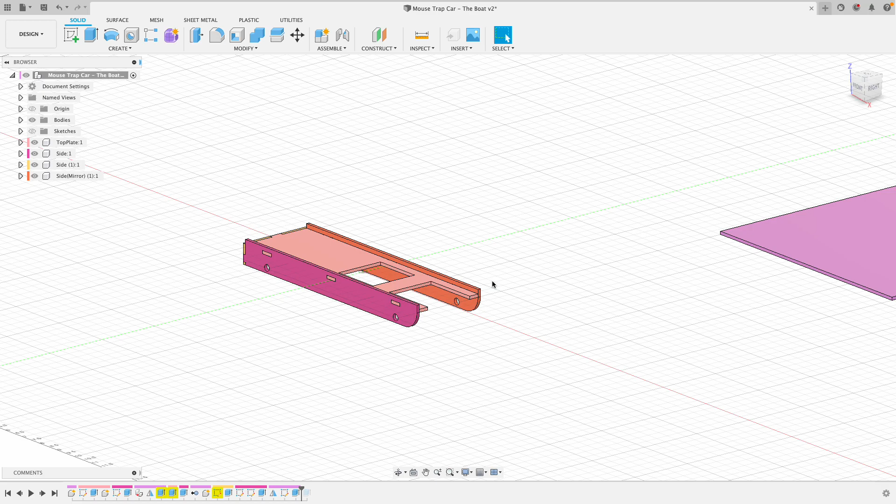We want to make sure we don't delete this, but hide it. So I'm going to go over here to bodies, and you want to find where your sketch palette is for that platform we built to manufacture it. I'm just going to hide that body. Simple as that, you can see it there. Mine's right there, yours might be under a component somewhere.

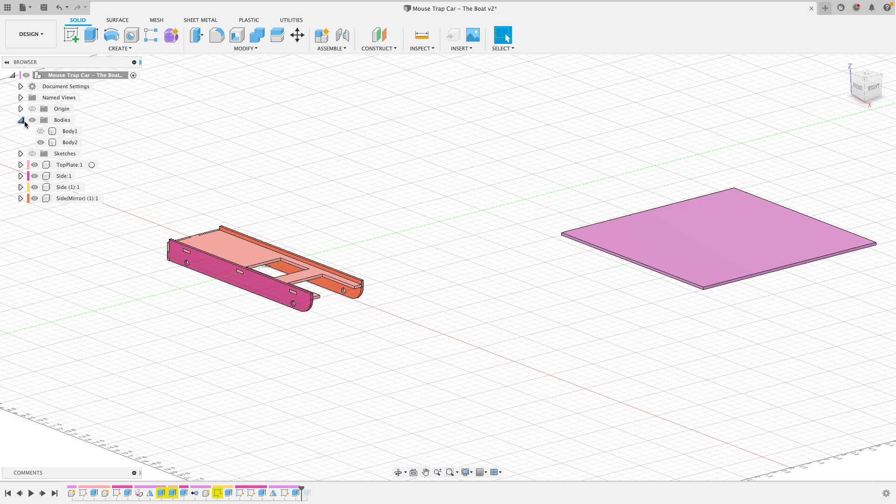You can see there's a couple different things. I have a body 1 and a body 2. I'm actually going to delete both of those right now, so I just have this here. Okay, so I have all my components: my top plate, my sides, and then I have a back side too.

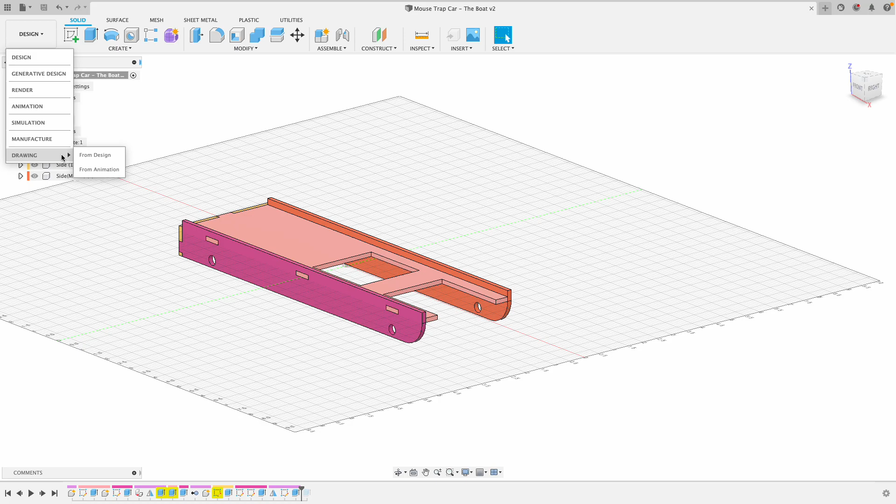I'm going to save it right now, and then go up to my design tab up here, and go down to drawing. We're going to do 'from design.' On drawing, we're going to make sure we have visible only selected.

We're going to create a new drawing. It's going to be from scratch. And we're going to do a 17 by 11 size paper. This is a B size paper, and we don't have to change anything else here. Click OK. This might take a second to pop up, especially on our Mac computers.

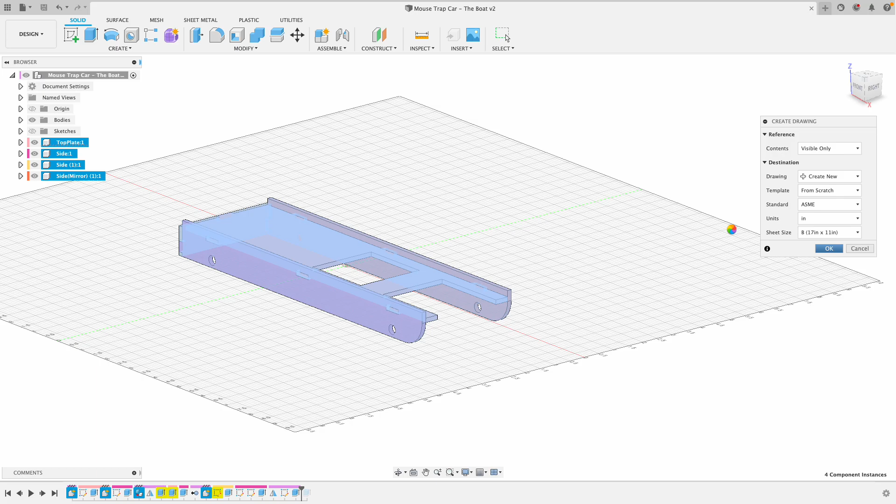This is going to allow us to make a drawing, an isometric and orthographic drawing of our different views that we have. I have a better computer than most of you, so mine's taking a moment to pop up here, so we'll give it a second.

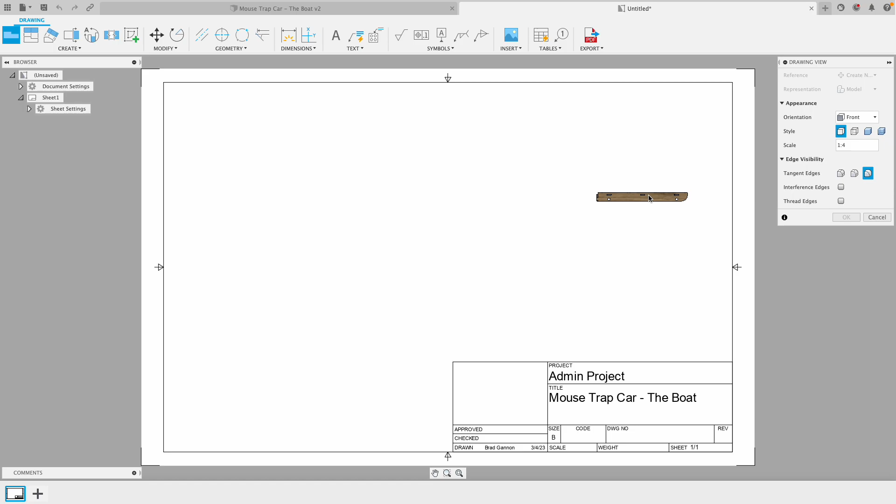Okay, cool. So you might see mine looks a little different, I have like a wood pattern on there. I added some texture onto it, and I'm going to get that off in a second. But I want to go over here to scale first, and I want to scale it 1 to 2. That should be big enough for our drawing here.

If we went 1 to 1, that's a full size scale, and you can see what that kind of looks like here. But I think it's going to be a little too big for our full drawing. Actually, I'm going to do 1 to 1, we'll see if it fits. Okay, it might fit here for a 1 to 1 drawing.

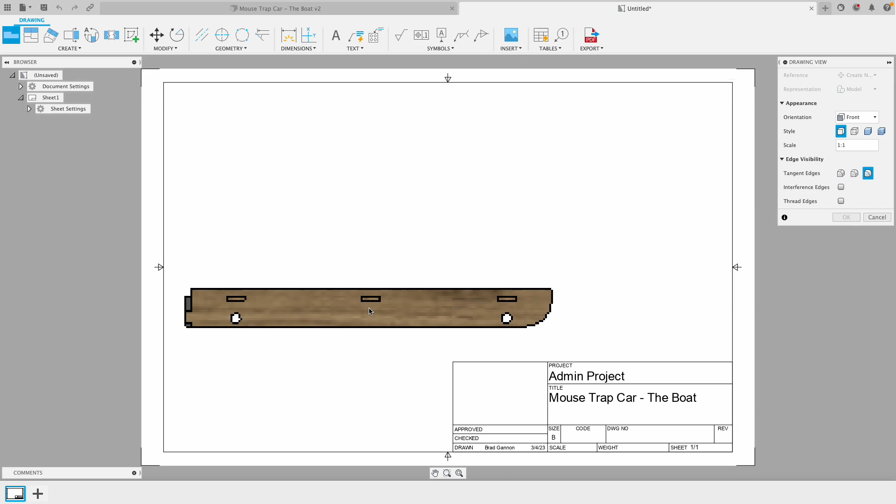So I'm going to put this right here, like so. Then before I click OK, I'm going to go up here to a projected view. We're going to project a view up, and I'm going to project this view up to here. Okay, this is the top of my drawing.

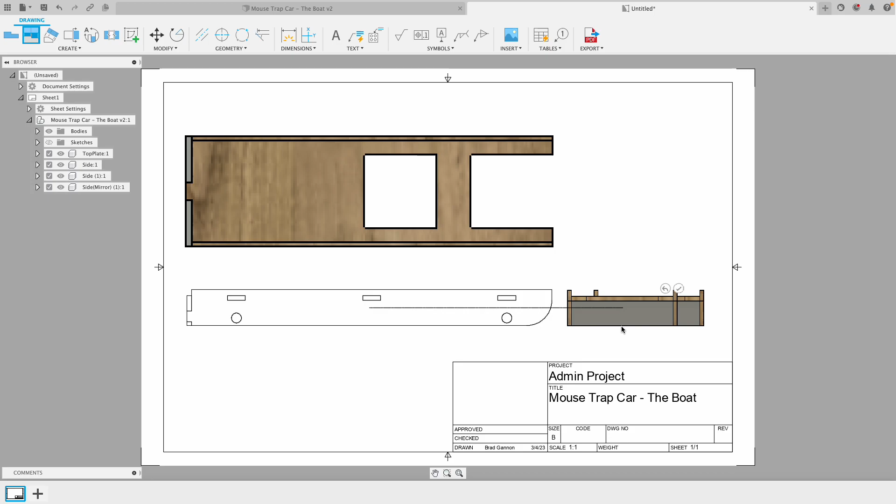And then I'm going to go down here to this one, and I want to get my right side or back side of my drawing, like so. And then I want to do this drawing too, I want to get a 3-dimensional view of it. So just moving around here, and then I'm going to hit enter.

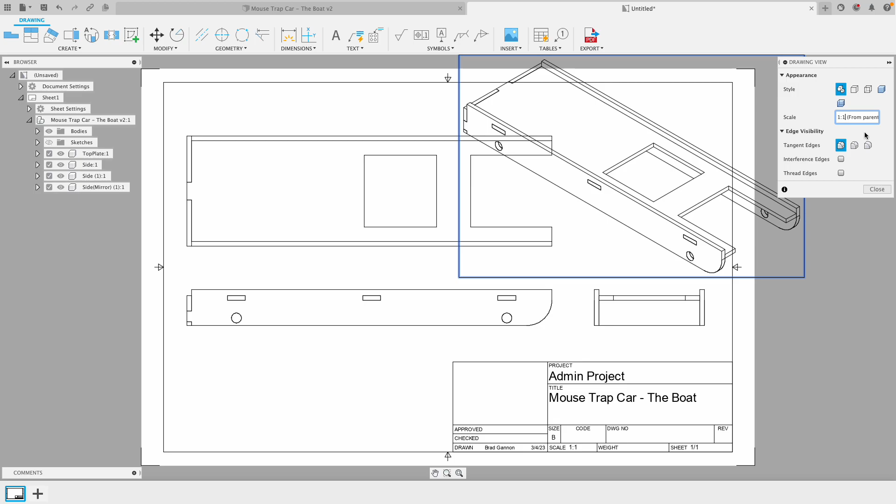I want to make this one a bit smaller, maybe 1 to 4. Let's try 1 to 3 and see if that fits. Looks like a 1 to 3 view might fit pretty well there, so we can put that in. I can click close, and move this around here like so, just to have a view of my drawing. Okay, so this is my car that I have set up here.

I want to add a few things on here. So I'm going to go up to geometry first, we're going to add some center marks. These are going to be for my wheels, for my axle holes here, and simply click on here, and this adds a center mark on there.

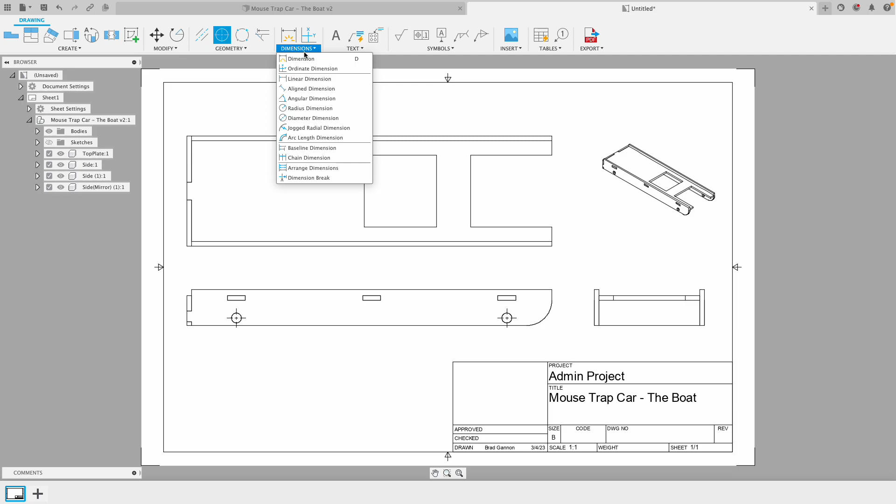And then I want to also add dimensions, and I'm just going to do simple dimensions on here. So dimensions, and you can choose what you want to dimension. I'm going to do a linear dimension, from this corner to this corner right there.

And I want to do it, I'm not sure why it ended up at 10.13, but that's okay. We'll do it down here, same idea. And then I'm going to do from that corner to that corner. Okay, just see what you want to measure out here.

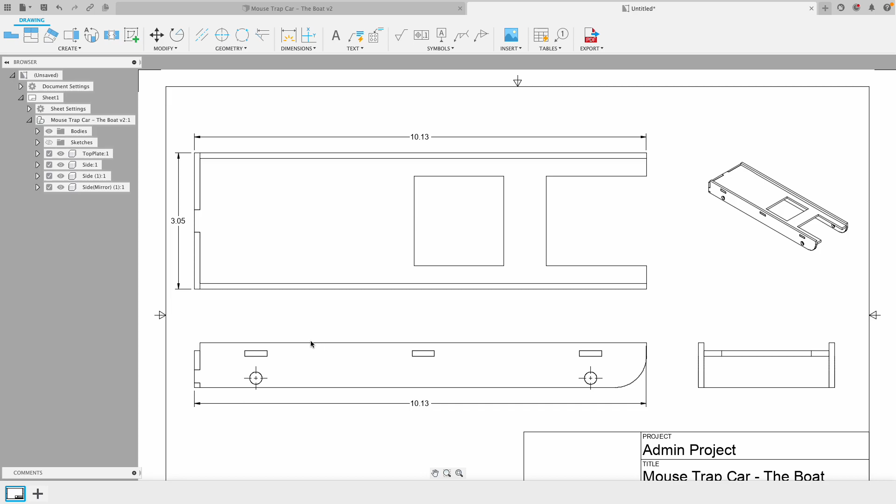I'm going to measure out one of these. I'm going to measure that center one, so we can see that, and I'll just drag it down here. And then I'm going to measure also this distance right here, going across, and we'll move that out there. Let's see if I can click on that one.

Enter it, close it out. And let's see if I can click on this dimension and move it out. That looks a little bit better.

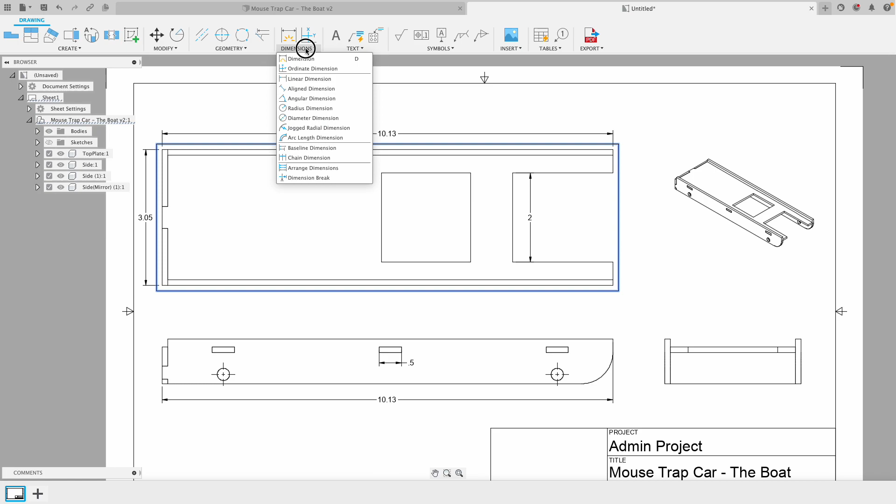And then I'll add another dimension over here, and you can skip forward through this video as I add these different dimensions here, just so we can see that car a little bit better. I'll add one from here to here. And you don't want to get crazy with this, but we just want a general idea of the length and width of our car.

And I'm also going to put a dimension for the diameter of these holes here. So one on this one here, that's 0.28 inches. And I might be able to double click on that. If I escape here, I can double click on that and change those units to millimeters if I want to. I'll put millimeters there at the end and click close. So 7 millimeters for that diameter.

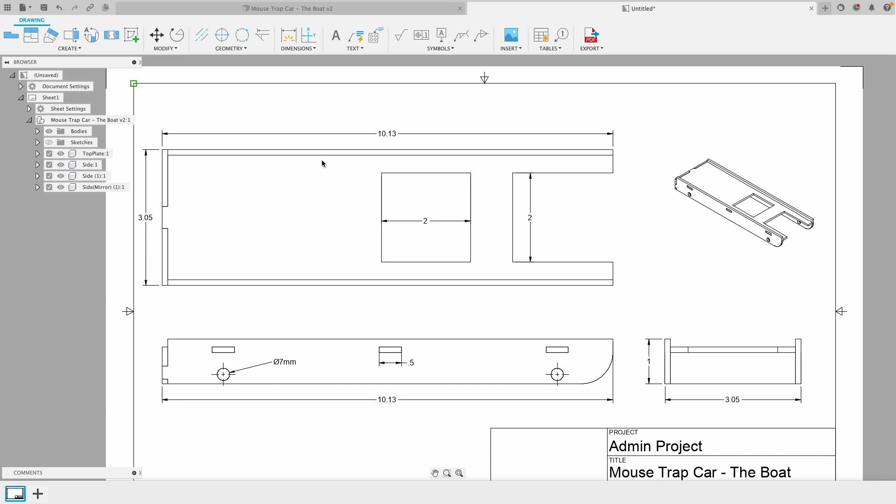And then I'm also going to put one more dimension on here. I'm going to do a regular linear dimension again, and I just want to make sure that everyone knows that this here is 0.13 inches. Now if I double click on here, I'll escape, double click on here, and add precision, because it's 0.125, we'll click close there, 0.125 inches.

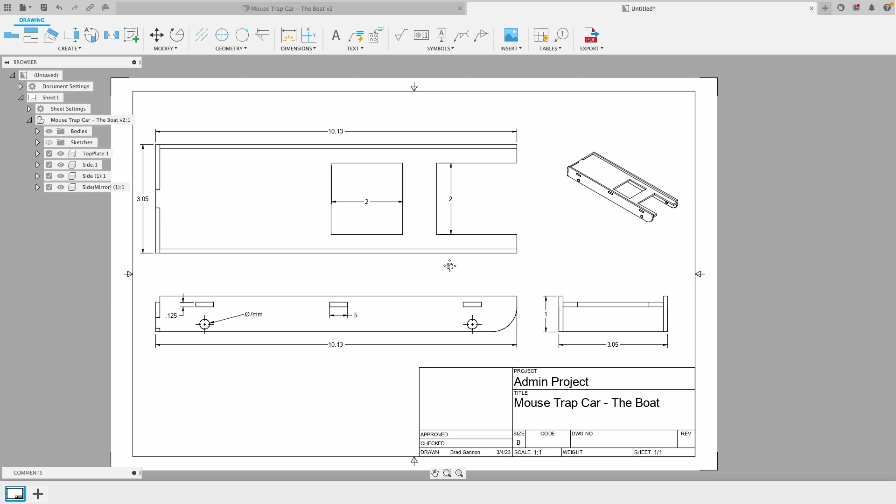All right, there's that. I'm going to put a project title on here, so this is going to be the mousetrap car. And this one here is called the boat.

Make sure you have your team names down here. So what I can do here, for example, if you can't fit all your names on there, I'm going to put B Gannon. Imagine some more students here. Like if I was working with a Bob Brown, I'd put like that. It's capital, and you can move things around a bit too. But if you're working with 3 or 4 people, do try and fit it on here. If you just want to put your initials down there, that's fine too.

Scale is going to be 1:1. And then I don't think we need to change anything else on here. So I can escape out of there, and you can see what that looks like.

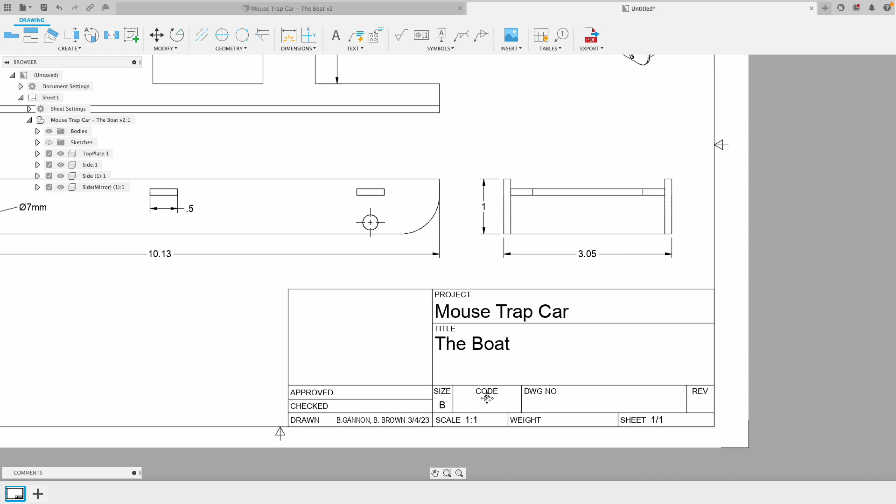You can leave everything else blank on here. We don't have a generic setup for our school. But I'm going to delete B Brown because I am the only person in this group.

Notice everything's capital there too. Okay, capitalization for our drawings is very important, especially for your name.

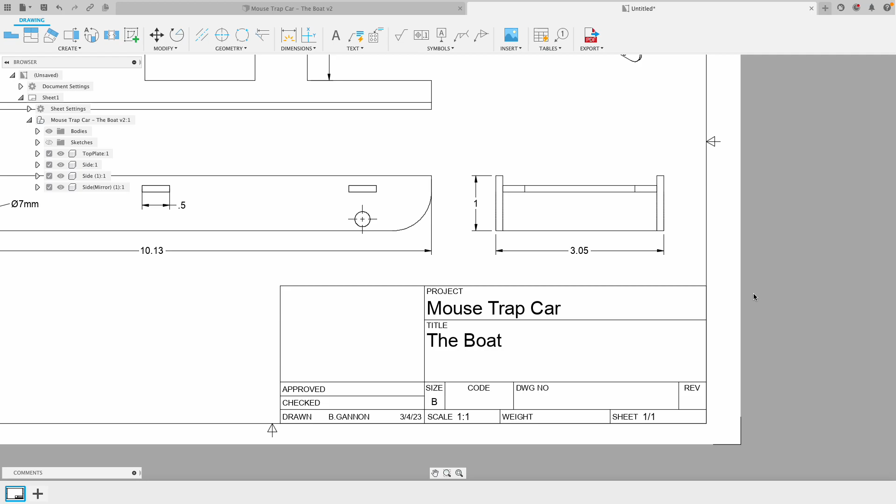All right, zoom back out here. This looks great, and I'm just going to go up here to export. Export as PDF. I want to do all sheets, and I can click on Open PDF if I want to. You can see line weights just changes the thickness of the lines. I'm going to keep line weights on, and then I click OK.

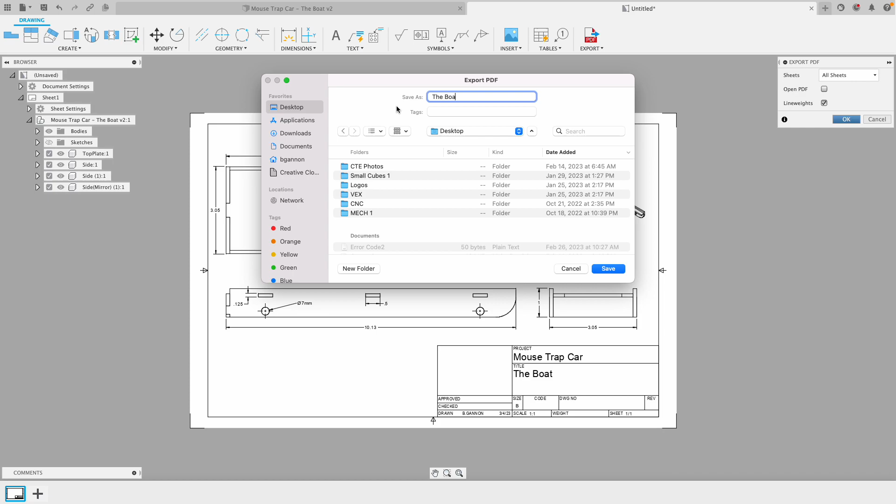And then I would save this. I'm going to save it to my desktop for right now. And this is the boat. Then we're going to be submitting this to Canvas, and you're also going to be posting it in your documentation. And click Save.

Cool. And then I should be able to find that up here on my desktop in my PDFs, and you can see what this looks like. And again, we're going to submit that to Canvas, and we're going to put this in our documentation. All right, that's it.